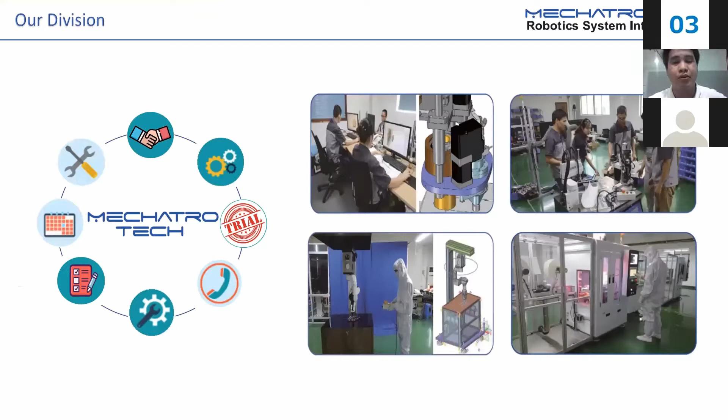This is a brief representation of our headquarters in Shenzhen, China. The upper portion would be the assembly and design area, and then the lower portion would be the actual simulation on a customer's production line.

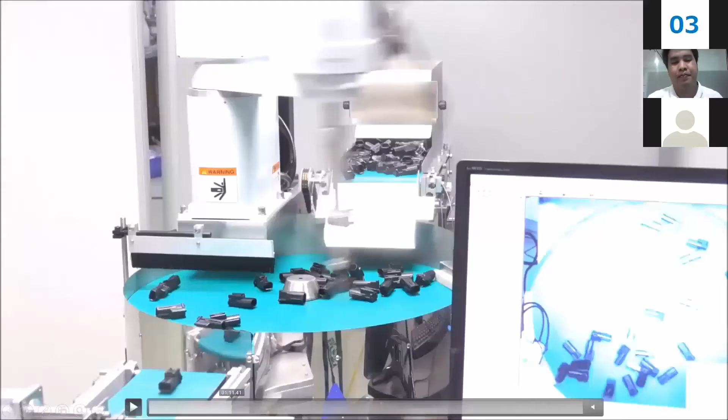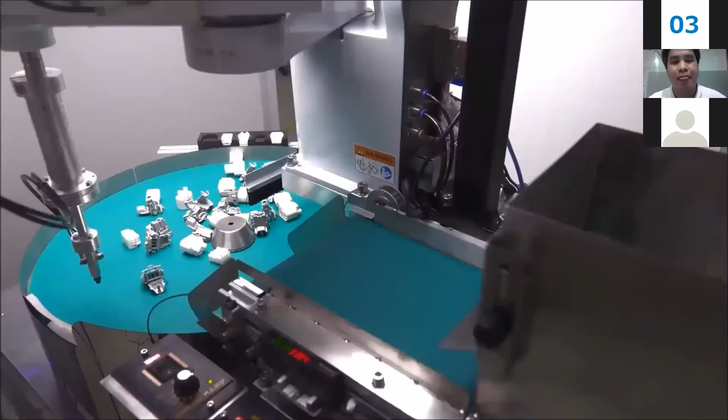I would like to fast forward into one of our machines that has been developed. Another one would be the robot feeder. This robot feeder, the model would be the Epson T3 robot, and this particular machine is responsible for sorting the orientation of connectors. You can load any type of variant of connectors, and then the camera will inspect the orientation, just as you can see on this video.

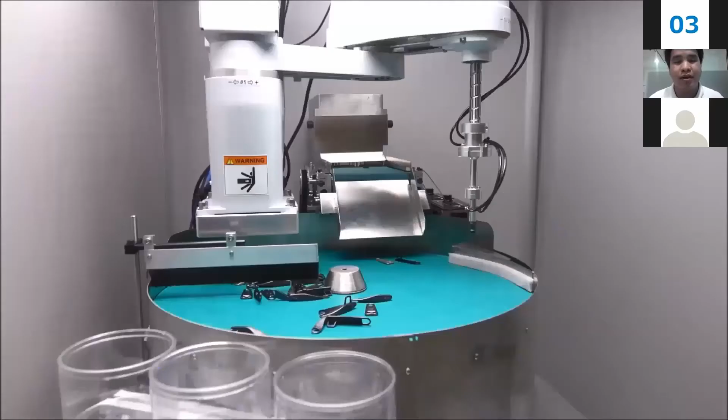As much as I would love to discuss other capabilities of our machine or our company, I'm afraid I need to move forward to the main topic, which is the vision inspection machine.

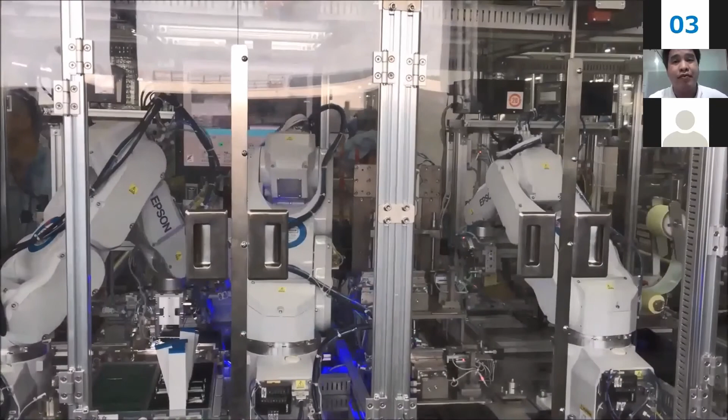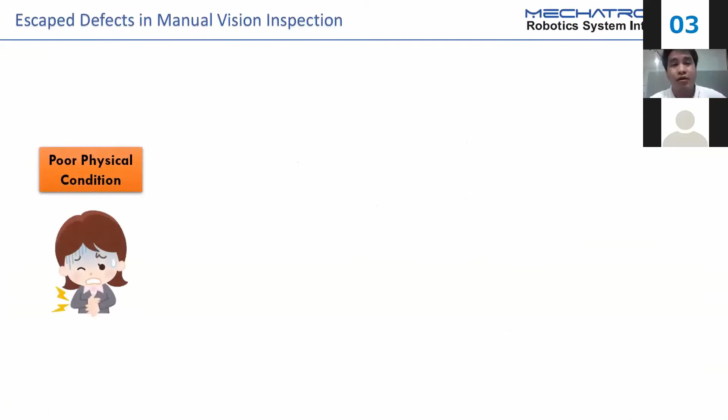Our main problem right now using human inspectors is that a common scenario would be we have escape defects or defect escape during the process of inspection. Why does it escape? There are so many reasons behind it, but most commonly are poor physical condition of the operators or inspectors, tiredness, they may be tired, they may be hungover, and sometimes boredom and inefficiency.

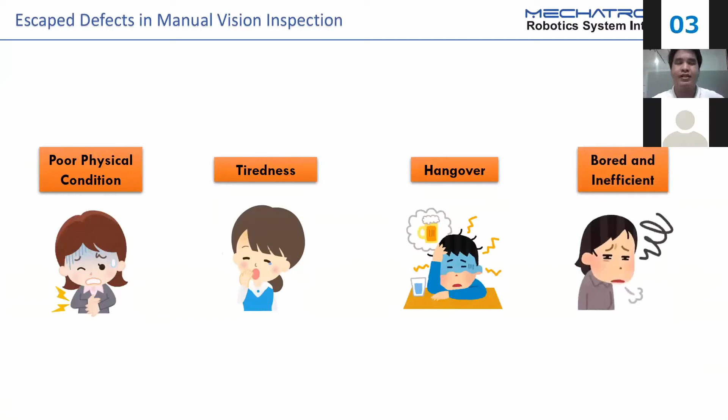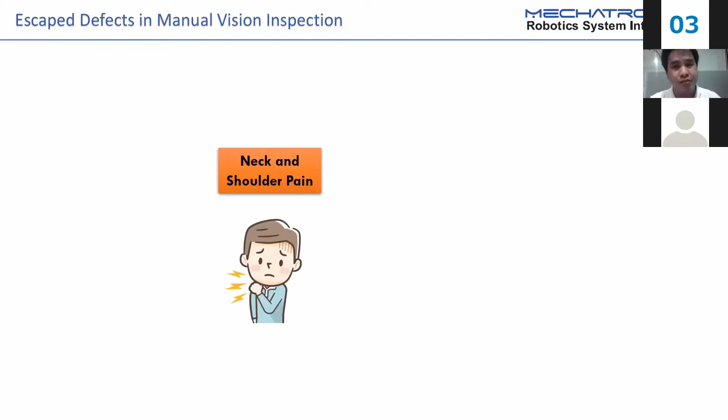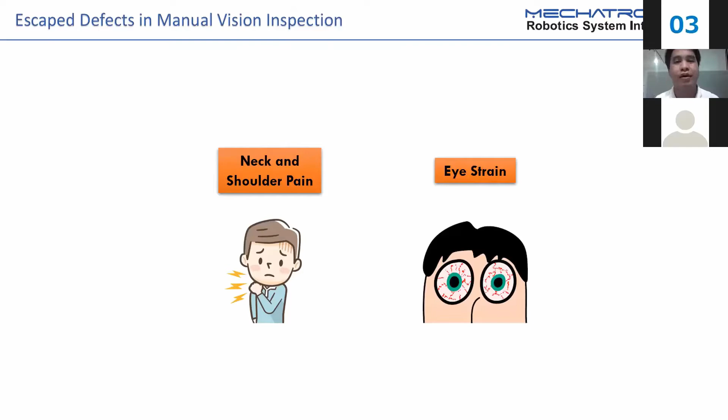As well as it can harm our operator, they felt pain, shoulder pain or neck pain during inspection because sometimes the inspected material is difficult to inspect, and eye strain also because of the minimal criteria being inspected, because of the size of it.

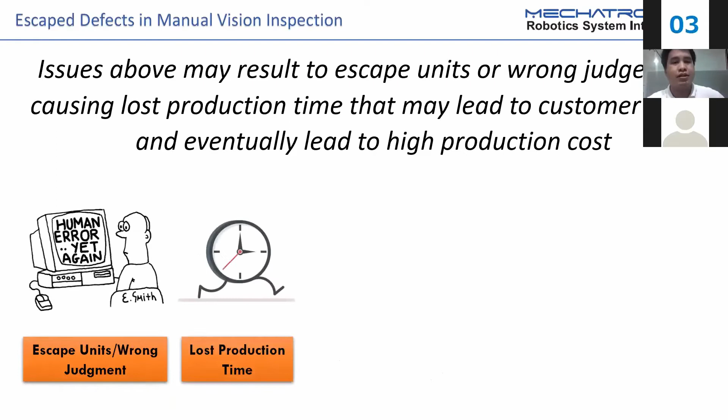Issues above may result to escape units or wrong judgment causing lost production time that may lead to customers' claims and eventually lead to high production costs.

Why does it happen? Let's say, for example, you have four criteria you need to inspect in a certain product, but on a particular day, you need to inspect the dirt. Let's say you have dirt, crush, presence, absence, etc., and you need to focus on the dirt. How does it work? Our brain works to achieve goals with the minimum information needed, so you can focus on the dirt itself, but how about other criteria?

That's how we need to help our inspectors. That's the way we can integrate or introduce our MVI, which is the Mechatro Vision Inspection.

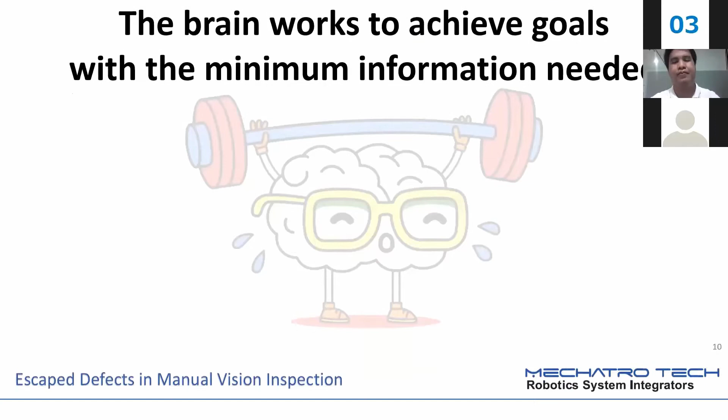What seems to be the correct guidance to visual inspectors, and how many are there? These are the common guidelines, but there are additional guidelines for our visual inspectors in order for them to be reliable and to give better performance.

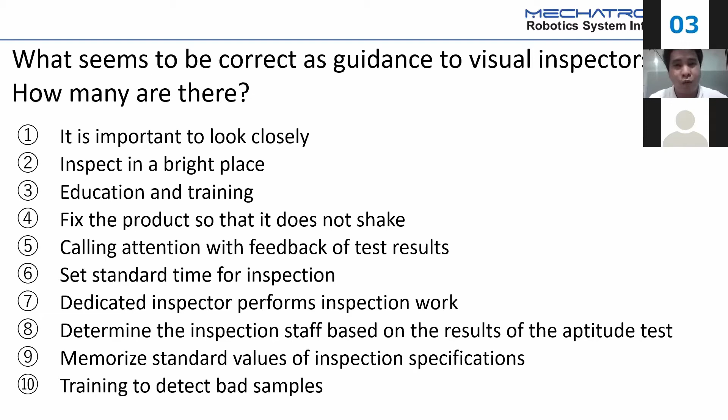How about if we help them by using the MVI? There are two major elements of automated or automatic inspection equipment using images.

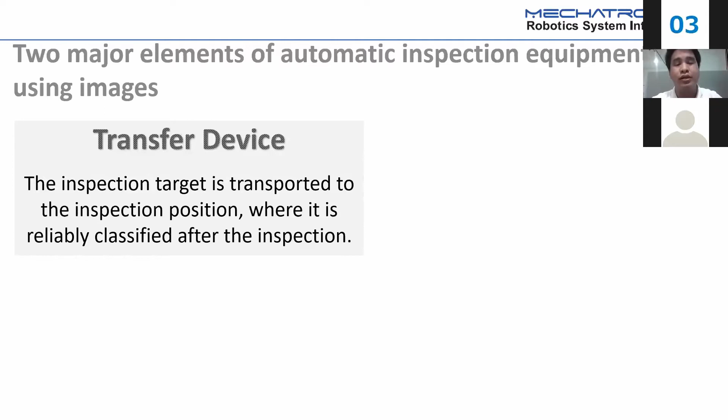One is the transfer device. Its responsibility is that the inspection target is transported to the inspection position, where it is reliably classified after the inspection.

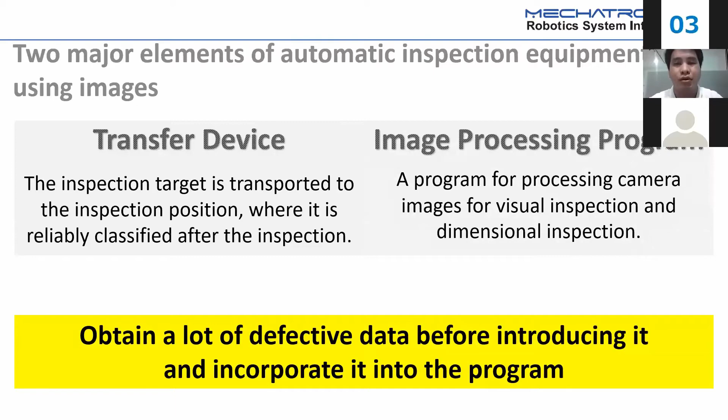Number 2 element would be the image processing program, a program for processing camera images for visual inspection and dimensional inspection. Also, these two major elements do not become reliable if we do not obtain a lot of defective data before introducing it and incorporate it into the program. So we need to gather so many samples and test and incorporate them into our program to be reliable.

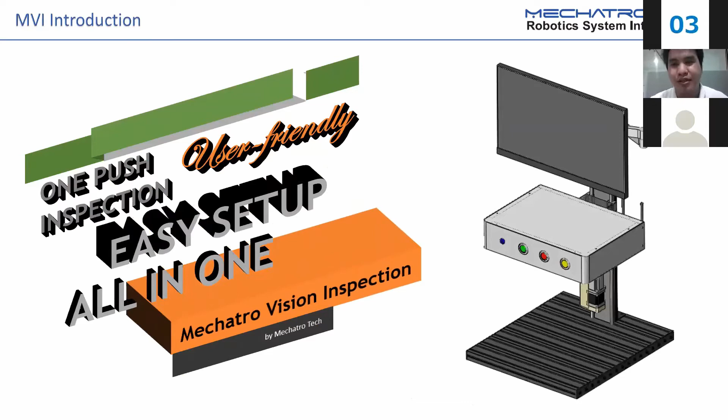I'd like to introduce the one-push inspection, user-friendly, easy setup, all-in-one Mechatro Vision Inspection. This would be the image when you look at it. It's just a tabletop, and I'd like to discuss the basic parts.

Number 1, there would be a display, control box which is responsible for the processing, it is the CPU. And camera - we have the height adjuster in order for the camera to get closer or further from the product being inspected. And lastly, the platform.

I would like to show you the demo MVI that I have here right now in the office, and it's just beside me. I will remote it right now.

This is the image of the camera - the product being inspected right now is the product I have here in the office. We have the I/O board for one of our machines. Hopefully you can see it well on your PC or cell phone or mobile gadget.

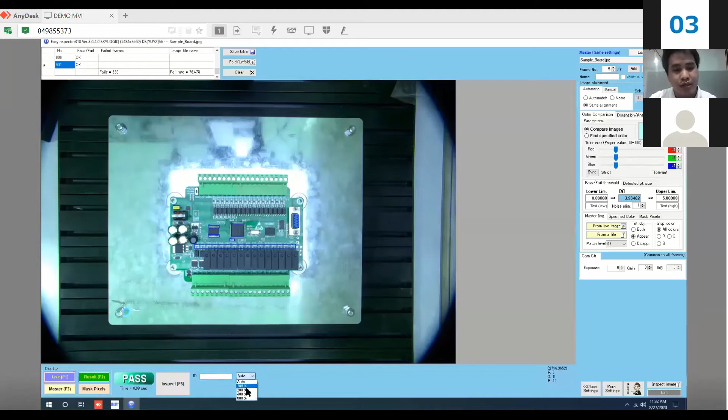I will inspect it right now, and the image right now is small, so I will adjust the image. So you can see the program that I have inputted right now. Right now it declares the pass or good condition, but allow me to go there and put some NG condition.

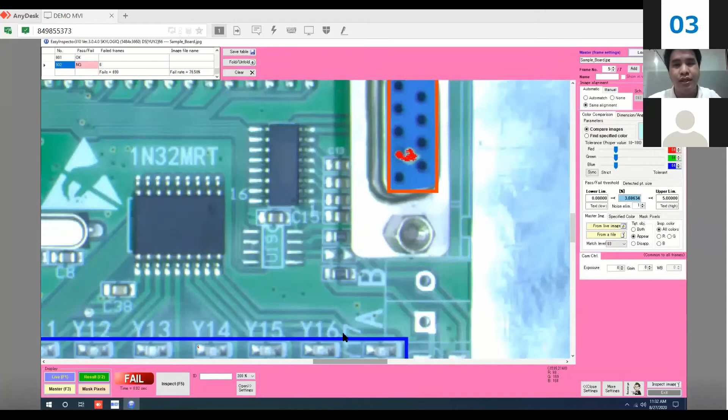We have a foreign material inserted into the pinhole. So it's not the image of the good product that I've inputted previously. So it detects fail or NG condition.

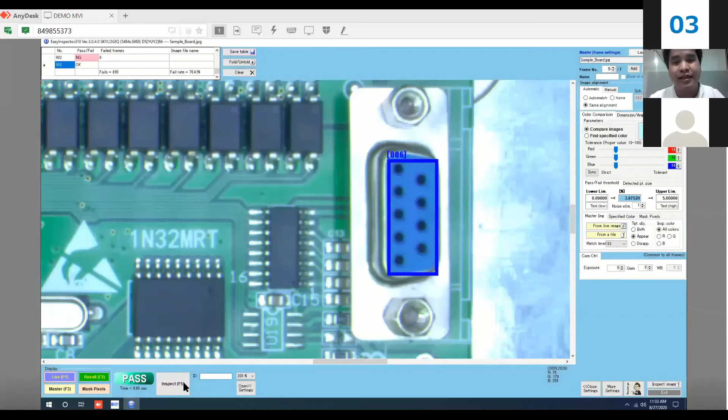I will remove it, please wait a moment. Okay, I've already removed it and try to inspect again. Right now, it's good. Let me try again with another sample for this particular IC.

Let's say I have accidentally put some dirt that has been attached to the surface of the IC. Let's check if it can detect it.

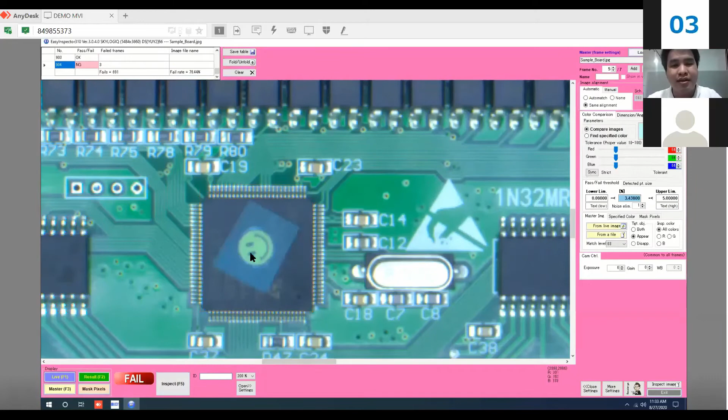Oh, I have a sticker here - hi, saying hello and smiling to you. Let me remove it for a while, and let's check.

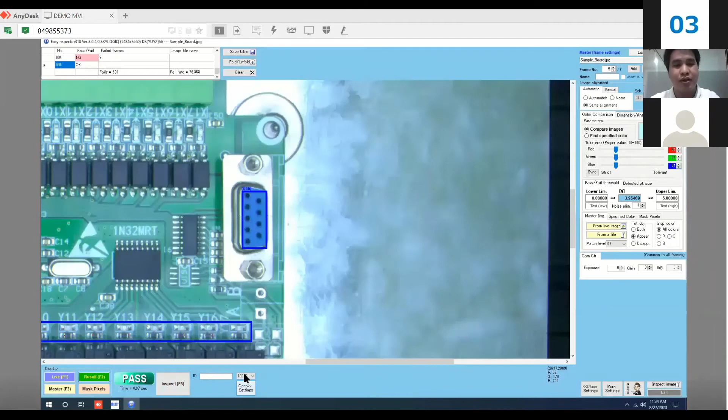So that would be a sample demonstration for you to see the actual capability of this particular MVI machine.

Also, I would like to show you how to adjust the height of this machine. Right now, I have the 5mm distance. I will input 50mm and let's check.

Let's check if you can see that it is moving. Right now, it moves further from the product, and let's put back the 5mm. It's getting closer right now.

So how about the luminance or the brightness? You can select the luminance here. I would like to adjust to a lower value, let's say 50. It should be darker - right now it's darker, and I would like a higher value of the brightness.

Also, you can adjust it bit by bit so you can attain the target or required brightness. Same as this motor position, you can just click here to adjust.

Hopefully you can see in your monitor the function. But you can see it well if I just input here and then, like that - it's moving further away. So I'll put back the original parameter and then just enter.

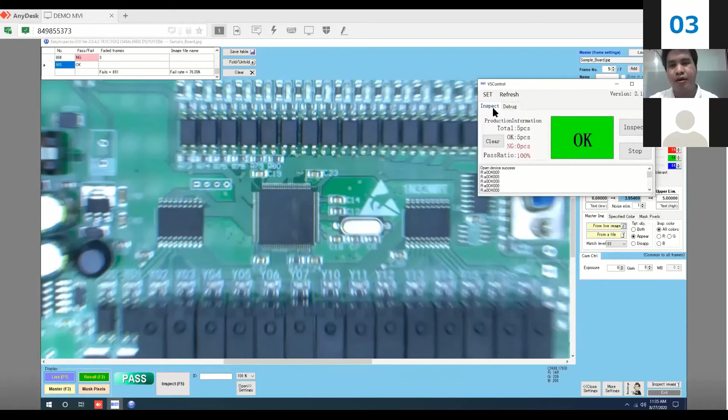And try to inspect, and it declares the good condition. So I'd like to move back to my presentation.

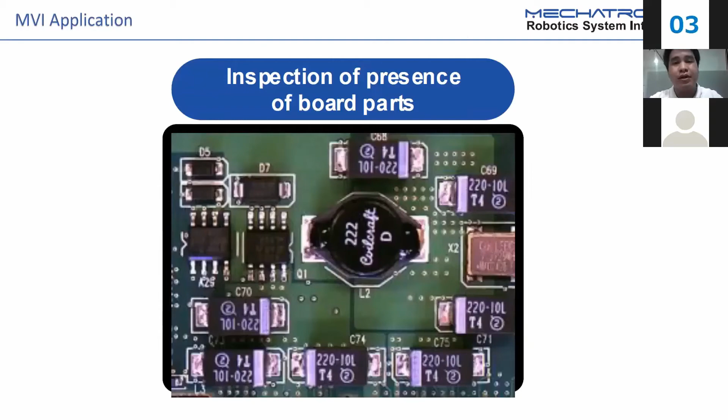This is the capabilities of the inspection or the MVI. It can inspect the presence of board parts, also connector pins omission and bend inspection. It can also inspect wire harness color.

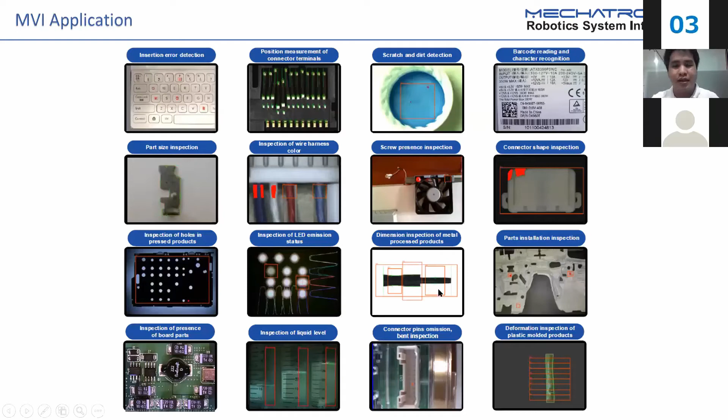We have applications also such as insertion error detection, position measurement of connector terminal, scratch and dirt detection, barcode reading and character recognition can also be detected, part size inspection, inspection of wire harness color, screw presence inspection, connector shape, inspection of hole, LED emission, dimension inspection, part installation, and liquid level.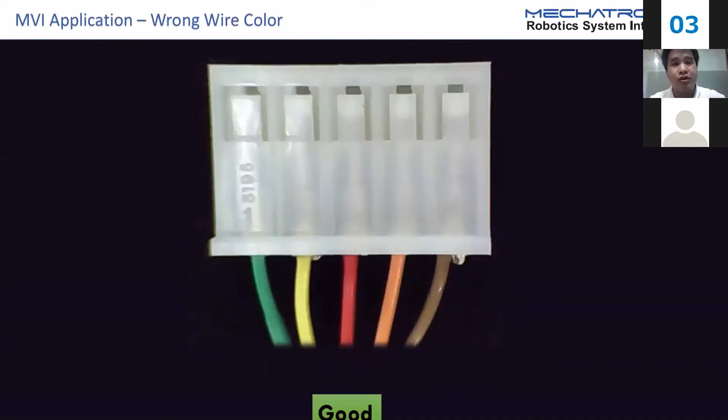This is a sample image for the good condition of wire color, and this is the sample image for the NG condition. How about the result? How do we determine the result image? It would be like this.

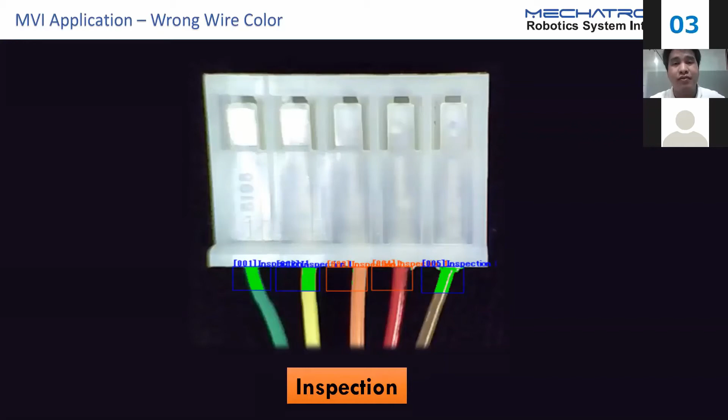We have the blue frame for the good condition as well as the red frame for the NG condition, because the red and orange color has been inverted. So their position has been inverted, so the declaration would be NG.

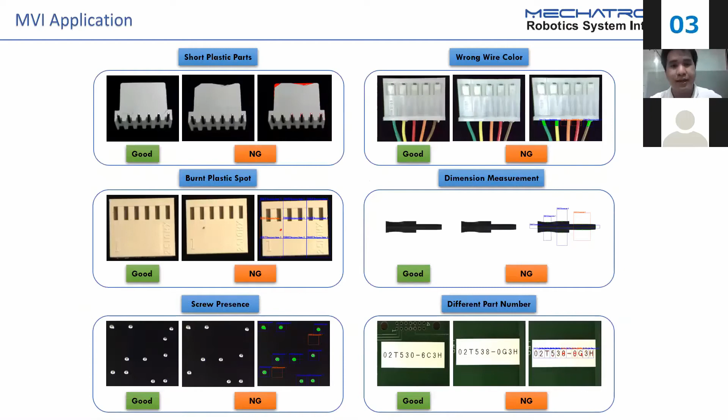This is an additional application sample. We can also detect short plastic parts, wrong wire color, as I mentioned earlier, burnt plastic spots, dimension measurement, screw presence, and different part numbers can be detected.

How about comparison to other makers? How do we compare this particular product to other manufacturers? We have the K brand, R brand, C brand, and Mechatro Tech.

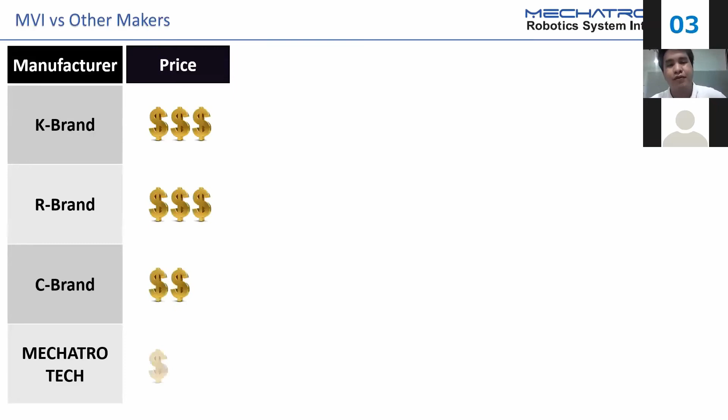How about the price? Would it be cheaper or expensive? As you can see, we have a cheaper product compared to other products. As for the delivery, you can see that we can deliver it faster.

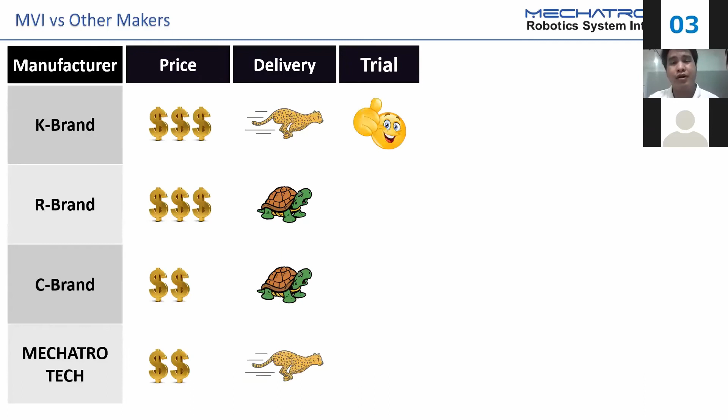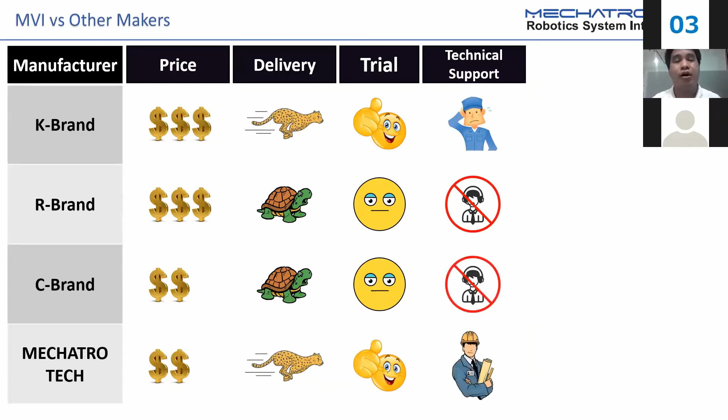Just give us the sample so we can generate the trial, and also we can support locally since we have our office here in the Philippines, our local site. We can also cater the transfer of device, as well as comprehensive evaluation, we can generate the report and give you the feedback.

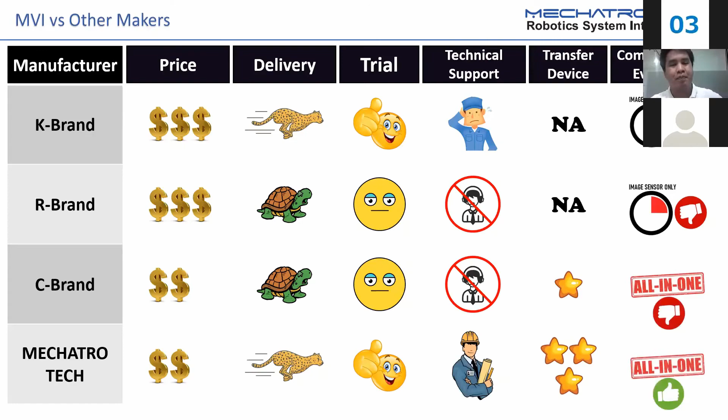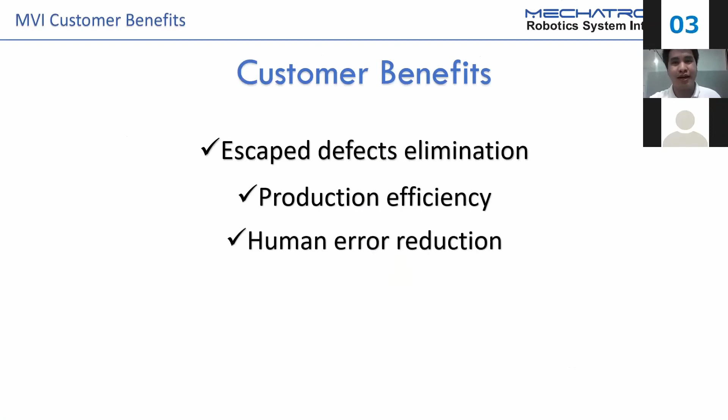For the customer benefit, number one, you can have escape defect elimination. We can increase your production efficiency. We can reduce human error, because that's the main function of this particular MVI. We can help your inspector. We can eliminate production downtime, ease on operation, and also ease for your maintenance team.

Because they can just call me and then I will help them, if I can remotely control or connect to the machine on your production site and give input immediately.